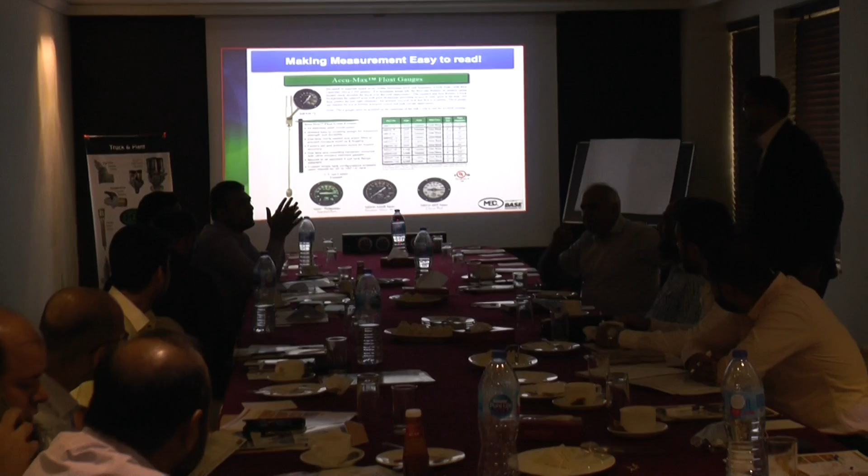Okay, please carry on. Yes, carry on. We will discuss this when we have our discussion session. Okay, no problem, yeah, no problem.

So basically, this is designed to replace the old rotor gauge. But yet I say again, the tank must have a manhole to access, to allow the other part of the gauge to access into the tank. That's the only problem. Other than that, if you have a manhole, it's not an issue. You can just change over the rotor gauge. Okay, next slide.

Okay, the other thing is regardless of the size of the tank, don't get too worried about the catalog. The catalog has standard lengths, but that doesn't mean we cannot produce different lengths. Yes, we can still make the length to suit your tank, and that's very important.

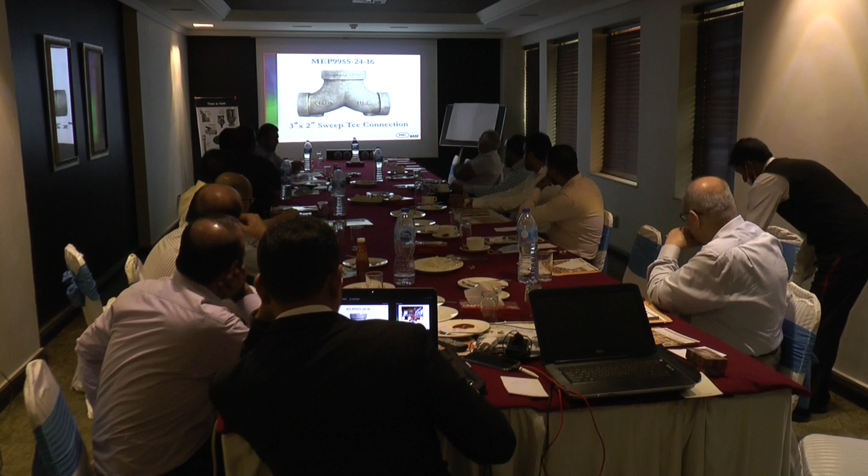This is also an elbow. We create that. I will show you some of the fitting that we designed for our customer in US. This is a 3-inch to 2-inch, this is a T. These are all casting, not welding. It's casting.

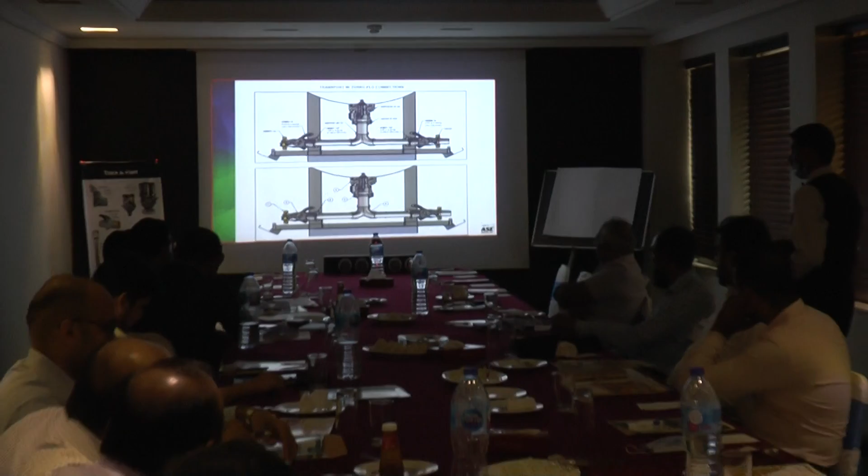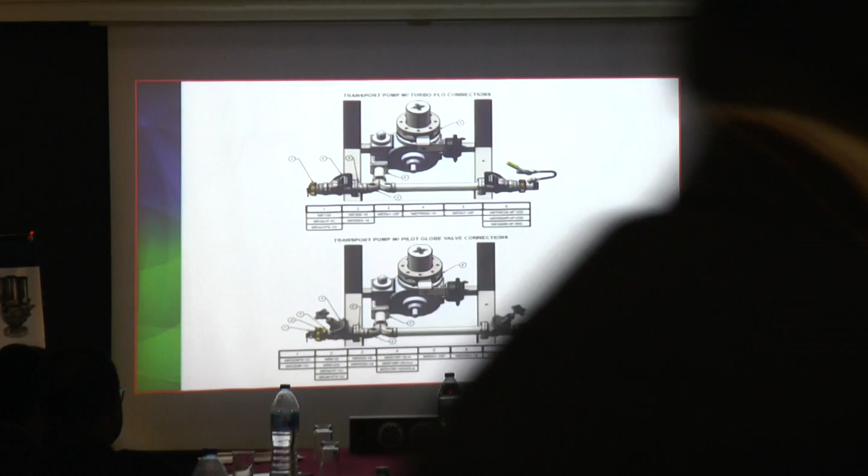This is one slide to show you how we connect the flow from the pump that sucks the liquid from the tank and then diverts down to left and right with a proper T.

This is a T that we actually created for discharge from the pump. The reason we developed this is because of the layout of the plumbing in US. I'm not sure about Pakistan, but this was developed to smoothen the flow.

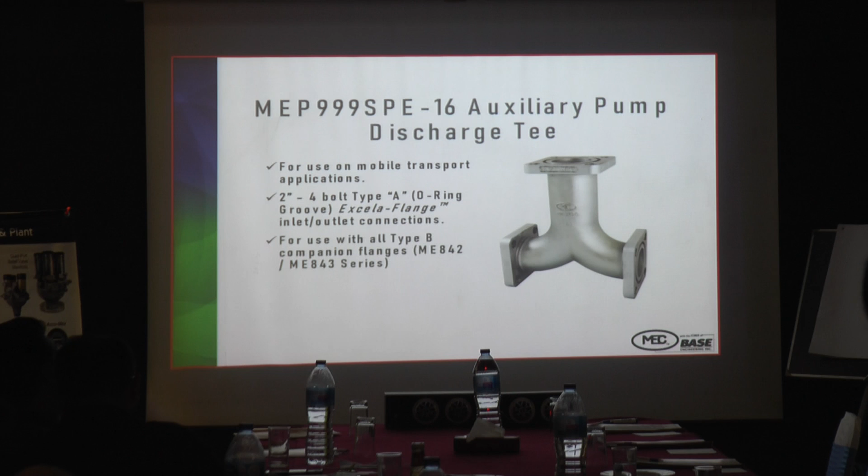These are some of the flow, and you'll notice some of the connections that we have. We are trying to use flange connection, square flange connection. The reason why we are doing that is flange connection you can tighten, and the leaking will be lesser compared to MPT. Flange connection might also reduce welding cost. You can think about that, look at our catalog and see how that can support your production.

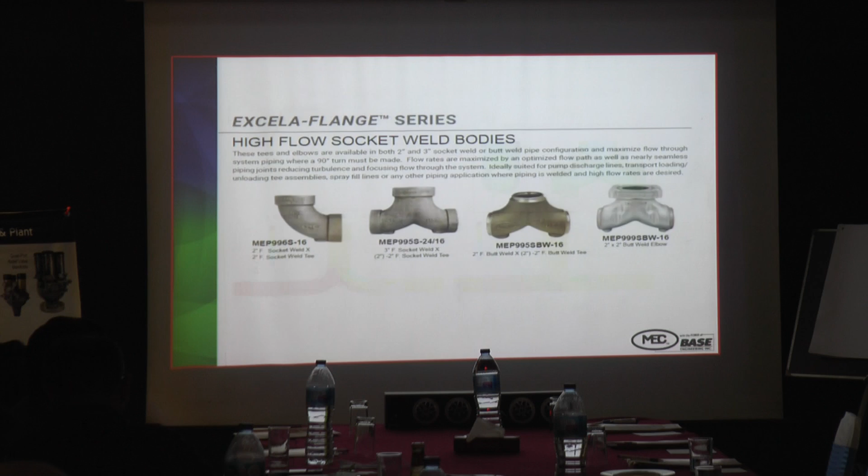When we design our T's, claws, or elbows, we don't design just because we fancy that bend. We did studies to see what is the pressure drop and what differences we make by having that design. So we have computer design, and we also do the test to find out how the flow is improved compared to a normal T.

Look on the right side, this is a standard T that normally people will wear, and you notice that the flow on this normal standard T is 270 gallons per minute. While we use our T, the flow has improved to 570 gallons. That's the difference. The flow is 2 times faster.

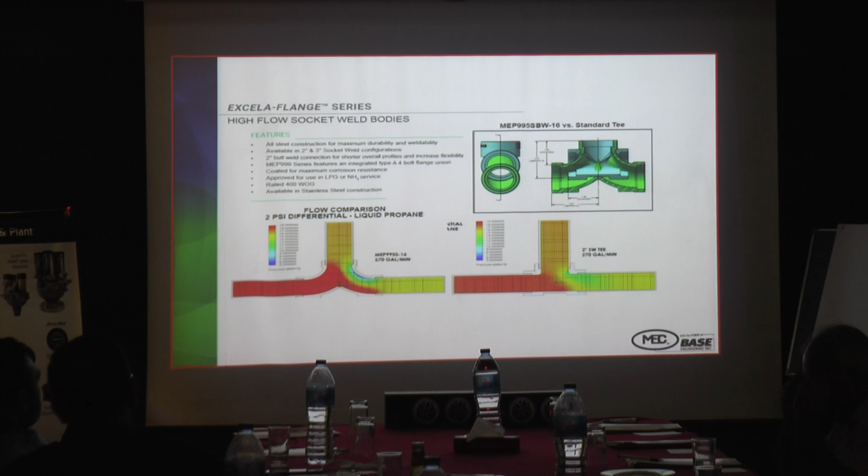So now you understand that for any liquid flowing out from the tank, you must have not only the right equipment, you must have the right plumbing. If your plumbing is right, the flow will increase by double. This is why we dominate the market in US, because the customer realized that what Marshall is doing for them is not only selling their equipment, we are trying to solve the plumbing issues that they are facing in US.

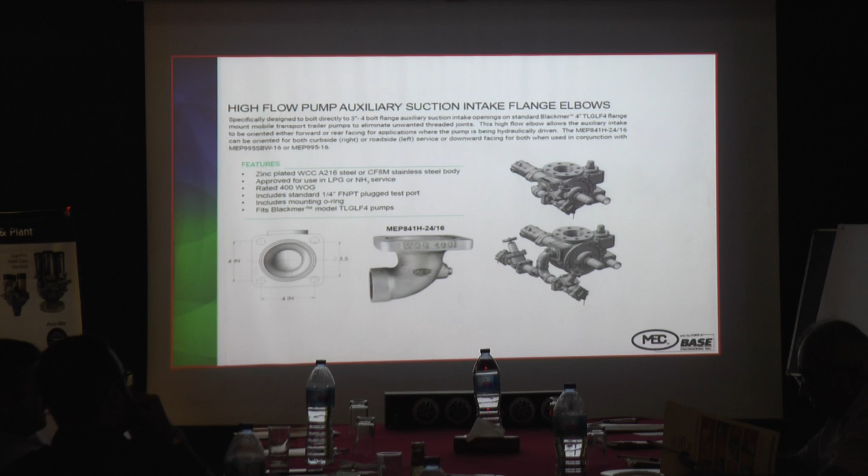We also have a connection towards the pump based on the feedback from the customer. This is one of them.

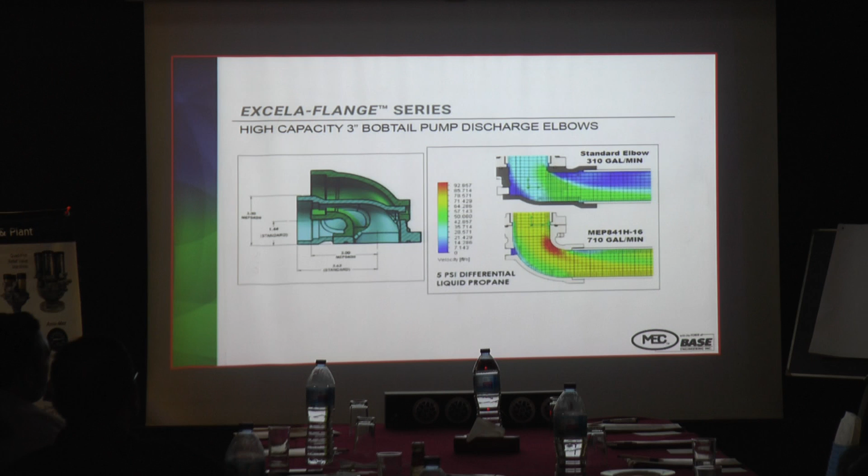This is another elbow. So wherever you see a high capacity, what we are trying to tell you is that we are trying to improve the flow. If you look at this on the right side, the chart with the colorful flow, the standard elbow will give you 310 gallons per minute. The one below is 710. It's almost 2 times, more than 2 times actually.

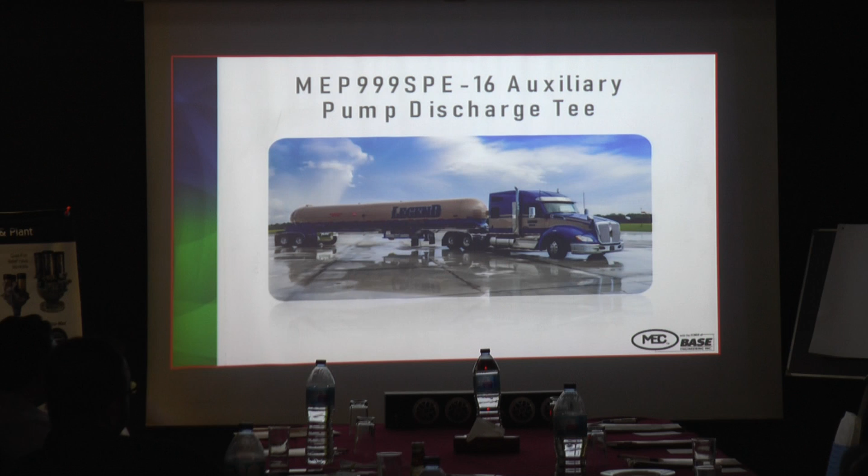These are all tested in the lab, it's not something that we just write. So now you see the same truck, we changed it because this truck manufacturer wanted to have a proper T. This slide shows that the T is okay, and the connection.

This is a square connection. You notice we're starting to use square flange connection. The reason is because welding is hard, so flange connection makes it easy to dismantle the equipment below and on top using just bolt and nut. Imagine NPT thread is slowly becoming obsolete in the US, because over a period of time NPT thread will rust and cause problems in maintenance and leaking. Flange connection is actually the best connection.

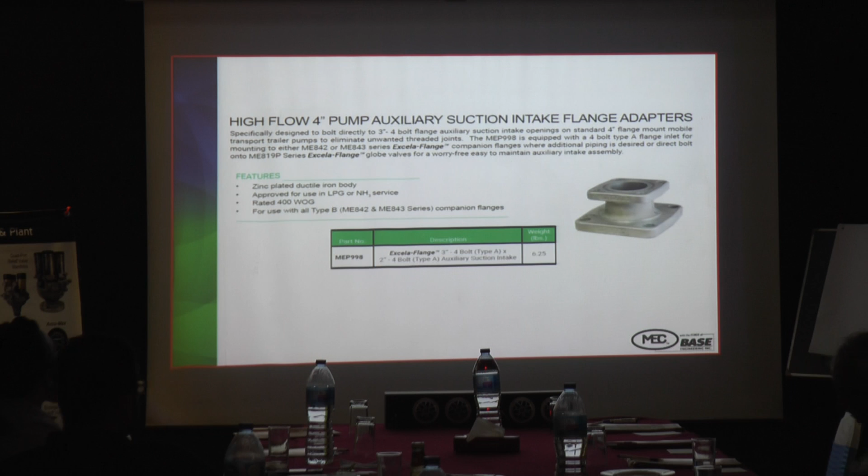If there's any leaking, most flanges have a gasket or O-ring on the flange that seals against it and eliminates leaking. During any vibration, normally a flange will not leak as bad as an NPT connection. If the flange connection is torqued correctly, it will not leak.

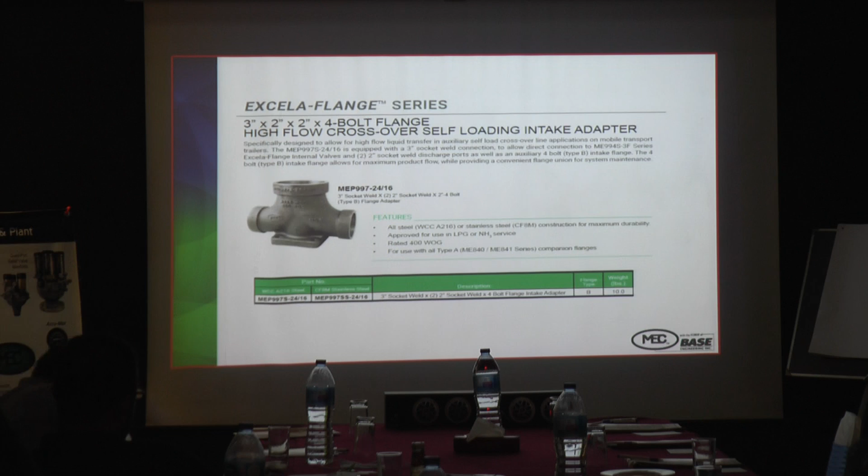Okay, this is a cross connection, this slide... yeah, I was about to show you because this slide was put in the wrong order.

Just on the front, you notice the reason we developed that blue T is to connect to the pump so that the flow is much better. This T is a bit longer, and we designed it for the customer because they have a high volume of trucks that require this. So we understand our customer's plumbing requirements in the US, and all those T fittings you saw previously are designed for those requirements.

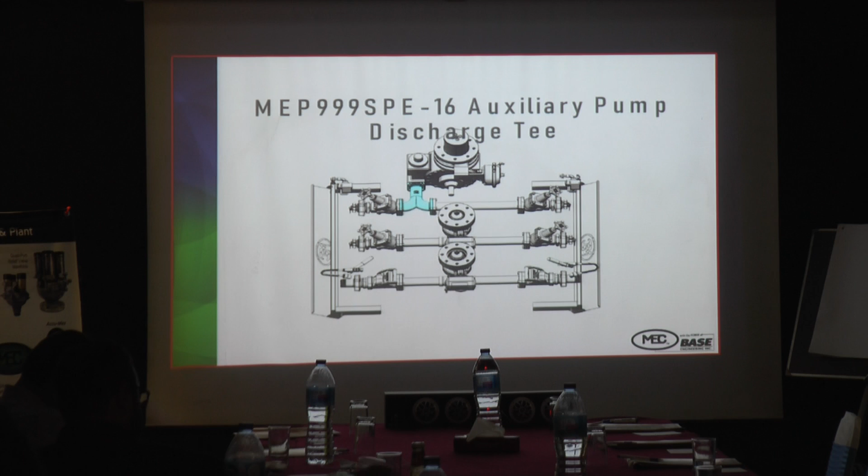I hope in Pakistan all the tank manufacturers can look into this and see those fittings, whether they can help you make your tank perform faster flow, flowing 2 times the speed of your current design. That is actually called innovation - you change the design. Okay, next slide.

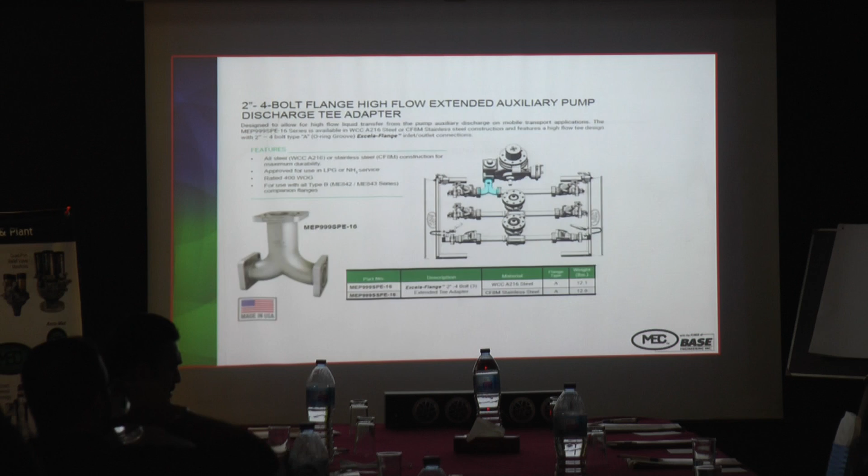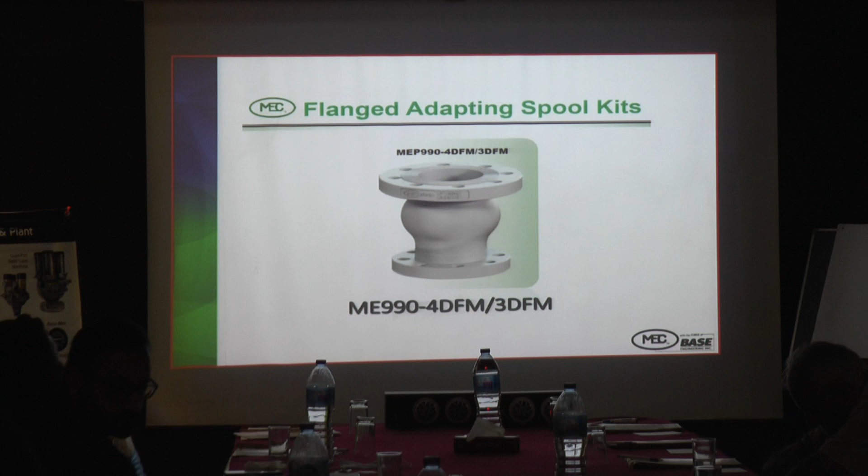That's why we always recommend every tank manufacturer, before they install any equipment into the tank, make sure the tank is internally clean, because most tank manufacturers, when they finish the tank, have to do a pressure test.

You put water into the tank - what do you call that - a hydrostatic test, to make sure the tank can withstand the pressure. So sometimes they put water into the tank to make sure there's no leaking. When you drain it out, most tanks internally have some coating, but sometimes if you do not clean it out, the water might create problems. That's the reason why we always encourage tank manufacturers to clean out the tank, dry everything, then fit in the fitting, so there will be no rubbish trapped on the internal valve.

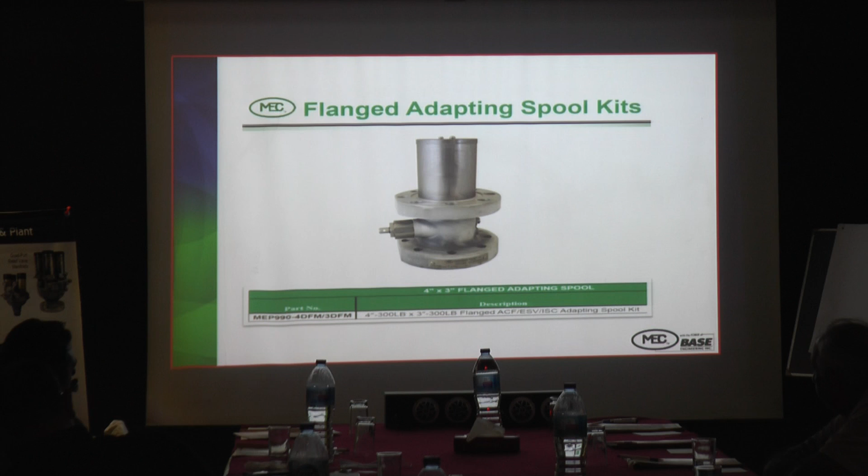Just now you saw the spool - there are situations where you cannot put this internal valve in the tank because of the old design, and you do not want to cut the tank. So especially for stationary tanks that you want to convert with an internal valve, what you can do is connect the flange and put the spool here, and put the internal valve below. So this is a modification for doing that.

The reason why this came out was very simple - in the old design in the US, most tanks don't have an internal valve. They use excess flow valve and ball valve to close on and off. Under US law, I think it's 2010, if I remember correctly.

All the tank manufacturers with existing tanks in the US were given something like 5 to 10 years to convert all tanks to use internal valve or emergency shutoff valve. That is why this design was developed, to accommodate old tanks that don't allow fitting an internal valve. So this is why we have that in US.

You'll be thinking, why don't they just put the internal valve inside the tank? But because these are old tanks, in US they use a lot of excess flow valve and back check valve for their stationary tanks. But under the law, those are not safe enough. They are good, but not safe enough. In case of fire, they will not perform anything better than the internal valve. So that's why the law changed and all the tanks had to change.

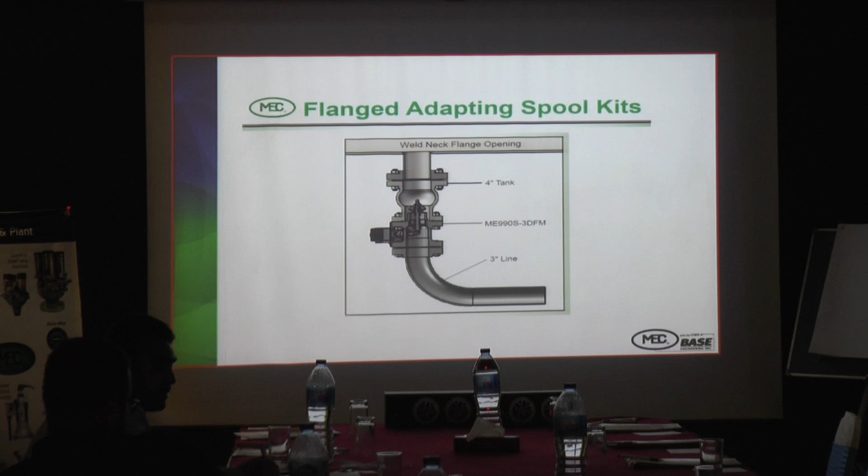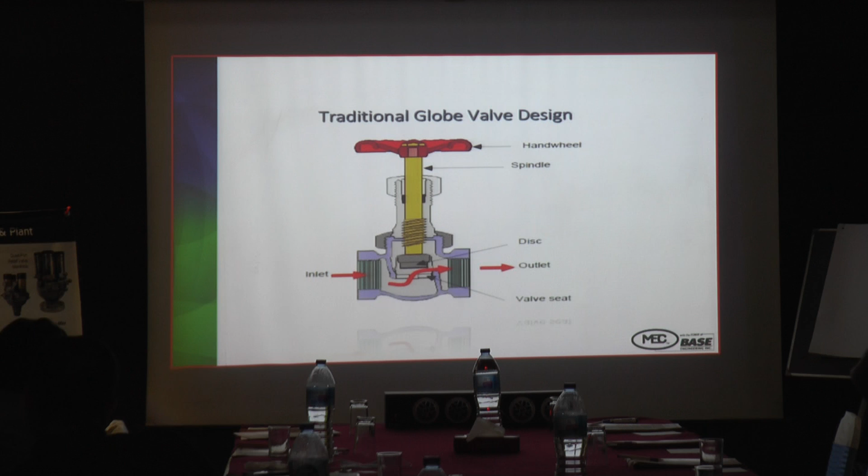This is a traditional globe valve, and a lot of so-called tank manufacturers hate it because the flow is very restricting and it actually slows down the flow. That's why people will go to the next one, the ball valve.

Oh, maybe the ball valve later. No, just go back to the other one. You can see the ball valve. The ball valve is traditionally used in most public settings. Yeah, okay, I'll talk about this one. Use the ball valve. Yeah, okay, go back to the previous slide. I want to discuss the traditional valve.

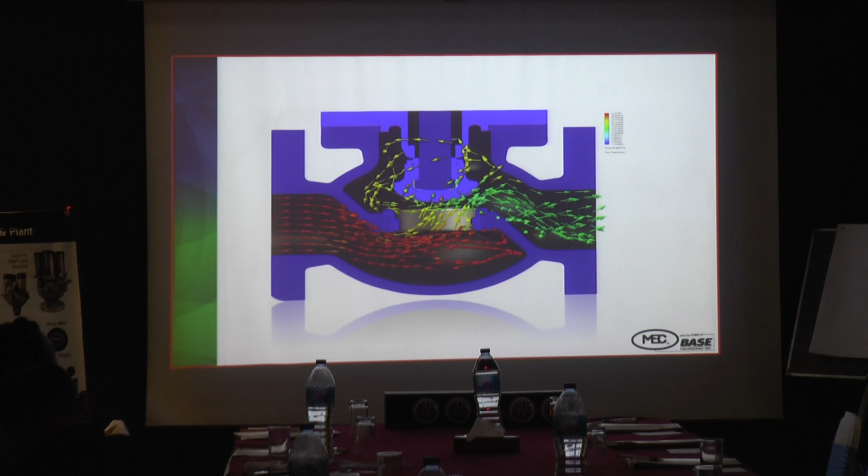You see this traditional globe valve, people don't like it because the flow is a lot more turbulent. We are talking about good flow, but this is not a good valve because it creates turbulence. Traditionally in the US they use this type of globe valve, and most plumbers don't like it because it slows down the flow. That's the reason for this slide.

Even in the US they use ball valve, and ball valve performs very well because it creates linear flow, perfect, very good. But notice above that ball, you can see there's totally no packing. When it's new, it provides a perfect seal. Imagine you have this ball valve on your transportation or stationary tank. Over a period of time, there's wear and tear, and the leak will come out from the handle. This creates a problem, and that's the reason why in US, traditional ball valve is actually not allowed.

It depends on where it's located. If it's located very near to the tank, it's normally not approved. If it's located downstream, it's okay - they might accept it downstream, but not near the tank.

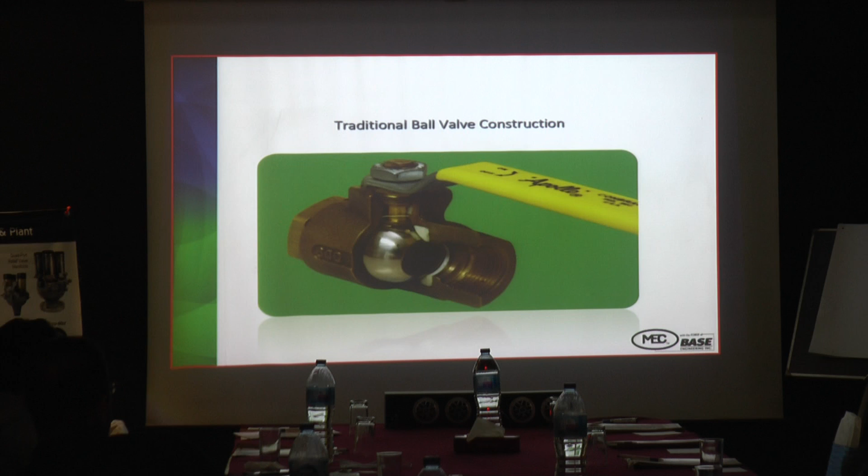That's the reason Marshall realized the globe valve doesn't perform well. But the advantage of globe valve is, you will notice at the stem head, they have packing, and this packing will prevent the leaking of the LPG from the stem. That's why when you look at ball valve, the stem area is so small that whenever there's wear and tear, it will leak.

So what Marshall does is tilt the stem to an angle of 15 degrees. By doing that, it actually allows 70% flow through the globe valve. This is a patent design by Marshall, and it works well. The advantage is that if over a period of time the stem loosens or wears, you can actually remove the stem and do the packing without removing the bulb, and that's the beauty of our design.

So you can do the maintenance online: remove the handle, take out the packing, put new packing, and then close it off. The gas will not leak out. The design is made in such a way it will not leak out through the handle. So basically, this is something that we designed.

There's a question about whether in US there's a requirement for a restricted flow valve, or you can use the standard flow valve as well. In US, globe valve is very popular. The reason they use globe valve is because the stem has packing, which prevents leaking. But in US they hate to use the traditional globe valve because, as I showed earlier, the flow is very turbulent and head loss is very high. That's why Marshall understood the problem and changed the design to allow 70% flow, and that actually encourages its use.

If we can use money to solve a problem, why not? Because money we can earn back, but the problem is always there. If you're ignorant, you just leave it there, but if the problem keeps coming, you're losing money. You ask yourself, if I solve the problem, if I can make more money, then the problem is solved. The worst thing is when not even money can solve the problem - then that is the real problem. So in life, you always ask yourself, if the problem can be solved by money, go ahead, because money can be earned.

But if there's an accident, if there is some life loss, sorry, this is something that you cannot bring back. So this is something that I want to share with you, because in my belief, I've been trying to understand what is the ignorance of human beings like me and everybody. It's because we must learn to understand our problem and solve it. So how to solve it? And that's very important. Sorry, I kept myself too emotional.

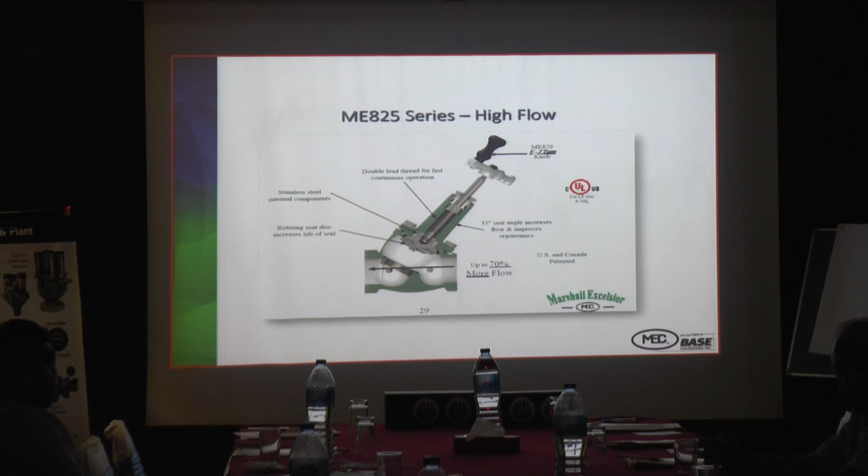Okay, so Marshall realized that you want a linear flow like a ball valve. So what we do is, this globe valve that we have created provides a linear flow. You can notice that the thing was totally leveled out and the flow is linear. So this is an intention that we have, and nobody has done it.

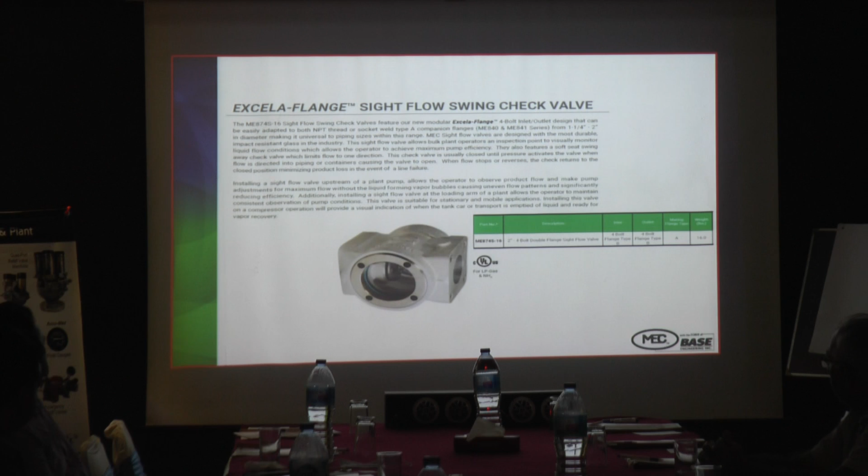This is actually a sight swing check valve. You can have this installed in your plumbing system, normally in the stationary tank area. The reason you want to have this is you want to see the flow of your LPG, and you want to make sure that you are visible. So this is for some customers - it's not a must requirement, but you want to see, so this allows you to see the flow of your LPG in your plant system. Okay, next slide.

Okay, what does Marshall Excelsior offer? Okay, next slide.

You see, just now we talked about the 5 questions that I raised, so I'm not going to repeat. So what do we actually want to offer? We want to offer a solution to the current problem. You might have it, you might not have it, and my solution is, as you saw in the previous slide, those designs, those innovations that we created were to address the problem that my customers in the US are facing, and also outside of the US.

So the next question we answer is how to select the right equipment for your customer's tank. Whether the manufacturer makes it or it belongs to the customer, the customer must understand that they need the right equipment to support their business operations. So we want to incorporate the latest technology to eliminate loss of LPG, and that's very important.

The fourth thing is to save life and save money. Saving money is something most LPG marketers overlook, because they always think that saving money means having the lowest cost of building the tank. Wrong. To save money is to have the right investment - not to overspend, but to have the right equipment for the tank - and the saving of money is in the operation of the whole plant and even the truck, and that's very important.

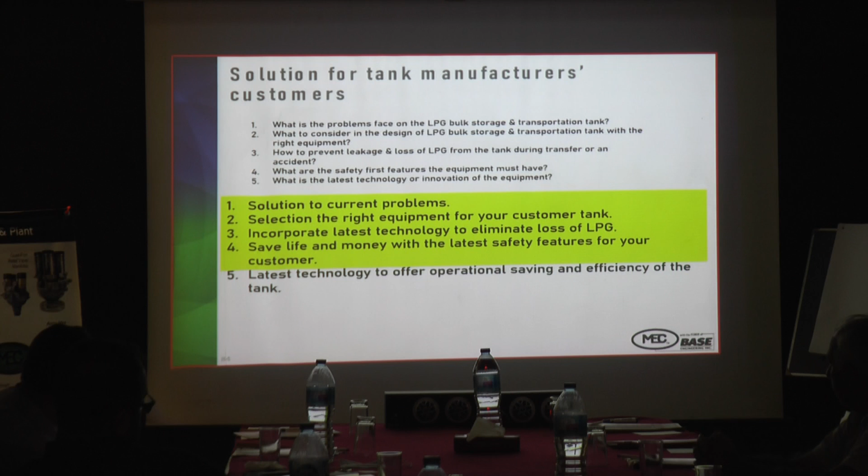So your business will grow when you select the right equipment for your customer base, and Marshall is your partner to grow your business with innovation. Marshall can have the best equipment in the world, but we need you to look into your business, whether you are the tank manufacturer, the marketer, or the authority who dominates the standard. In order for Pakistan's LPG industry to grow, we must innovate. Innovation is not invention - it's making small changes along the way to improve operations, and that can be done by everybody, not just by Marshall. Everybody can do innovation. Next slide.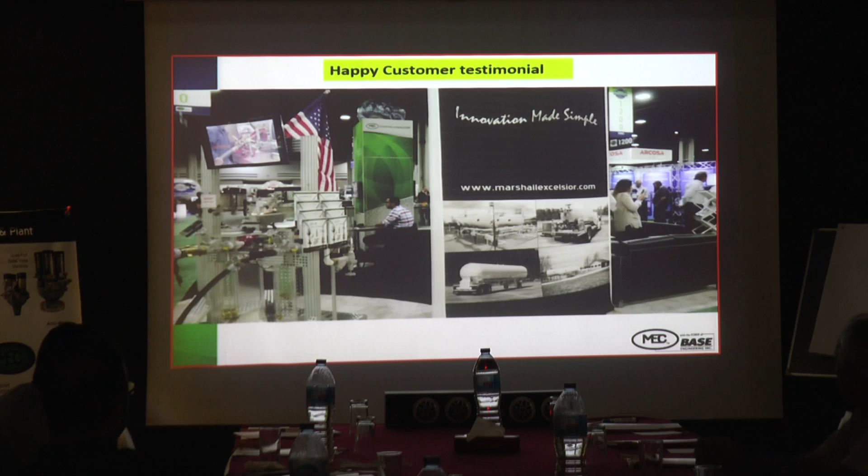What's most important? Why are you buying the Marshall Excelsior products? This is a customer they interviewed for us in the exhibition, when we grab hold of you and just let them talk.

We don't have problems with the product. Many years ago we had some other brand products that we used that caused us problems, and in the winter we can't have that. We have not had with MEC products any issues in the wintertime.

I think one of the things for me with MEC that kind of makes them stand out is I really truly believe that they test their product, research their product, and are very concerned in desiring to have their product be the best it could be. And I believe that's what they produce.

It's a great product for us. It performs top notch, and they stand behind it, but we've been extremely happy with it over the 10 plus years that we've been using our product.

So imagine, especially in the US, not many customers want to give testimony. But if one does give one, it means it improves - Marshall has offered a solution for it. And that's more important to us. We want our customer to be happy, and we will deliver a solution.